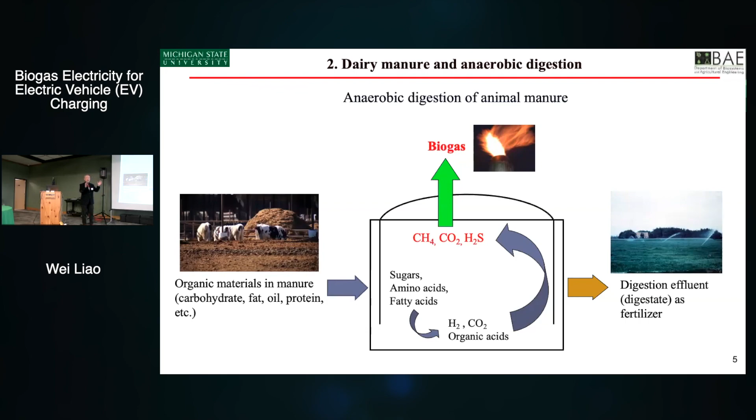If you look at dairy, cattle, swine, poultry, and some other mixed co-digestion systems, and the size, for example dairy, farms with less than 5,000 cows, not a whole lot. All those big ones, 20,000, 15,000, are typical dairy farm digesters in the United States. Overall agricultural digesters, only 332, maybe plus or minus 10 right now. The number changes every month. Just to give a comparison, Germany, a much smaller country than ours, has 8,000 farm digesters compared to our 300. And among the 300 digesters, most are large scale, which in the dairy industry means 1,000 dairy cows and above, only a few less than that.

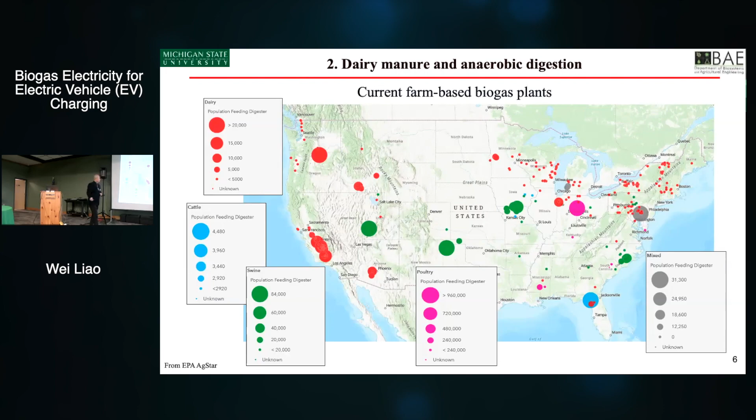And again, to give you a little bit of the overall country picture, because we work with USDA and EPA doing evaluation for the entire biogas industry. If you look at all the livestock, wastewater treatment plants, landfills, and the current status, based on current renewable natural gas and down the road electricity for electric vehicles, we believe there's huge potential for this industry to grow. Not only the agriculture side, the municipal side too. And we strongly believe down the road decentralized systems will be part of the picture.

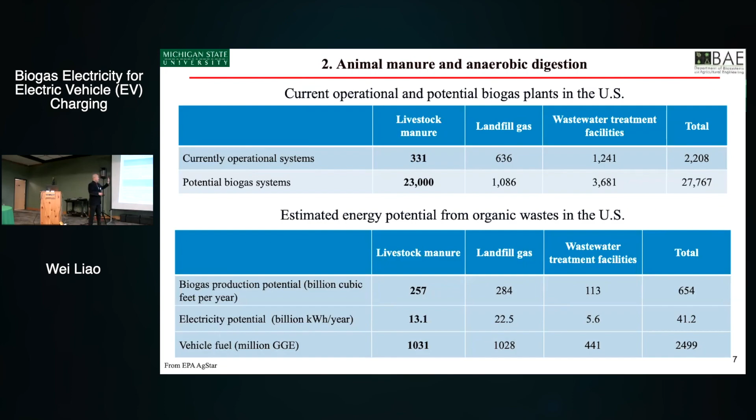The United States is good at building centralized facilities. Large cities, Chicago, Detroit, build big systems. But considering infrastructure investment, smaller systems have some advantages. Down the road it's going to be a combination. I'm not saying no large infrastructure investment. There is some, but decentralized systems, particularly for rural communities, will be the key player for the infrastructure, not only digestion, other things too. So that's a little bit of an overview to see the potential there.

I'm going to jump into the topic and show the current pathways for farm-based biogas utilization. It's pretty clear at this moment. Renewable heat and electricity: the easiest way is to put the engine there with the digesters, burn the biogas, and generate electricity. And then, of course, in the past 5 to 10 years, it's renewable natural gas, particularly with California's low carbon fuel standard, around 12 years of history for that program. These are the current two pathways.

Again, as I mentioned, both pathways have some challenges. Right here is a little bit of a long sentence. I'm not going to read it, but very much for small-scale systems, the current heat and electricity generation pathway is tough. We run our own engines, oil changes, and maintenance. Sometimes you need to take out the piston and clean all those kinds of things up. We have one dedicated person for our small system, a much, much smaller unit operation.

We only have 400 kilowatts, the unit on campus, but we have one dedicated technician to handle everything. And of course, we build our system - everything we import from Germany. In the first couple of years, we actually flew German engineers to do all the maintenance stuff. Very, very expensive and very complicated.

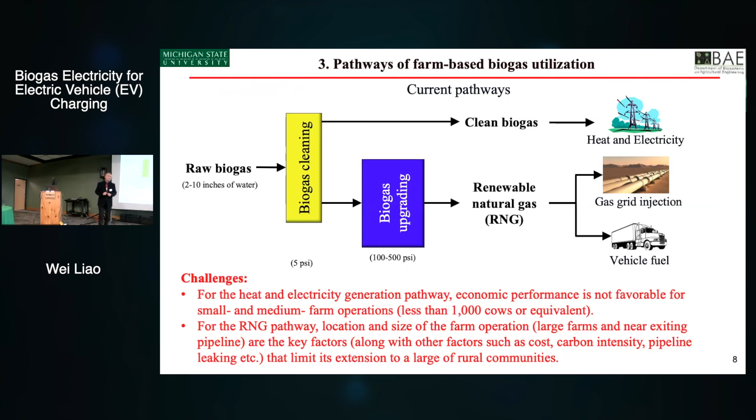The entire biogas upgrading unit is a $40 million investment. Of course, that operation is big - you think about that investment. Again, this is not, at this moment, economically an option for small to medium farms. That's very clear, right? Okay.

Then what do we have in our toolbox, particularly for - too fast, let's see one more slide - what we can do. And again, thankful to Elon Musk - let's see, Tesla, they're leading all that kind of EV stuff, started probably 15 years ago.

And that makes a third pathway possible for agriculture - let's put this case, the dairy industry. So which means start from biogas, and again as mentioned earlier, we need to design those maintenance-free engine systems. For this particular case, we work with Stirling Engine Company - we have two units testing at our facility.

Talk about external combustion - environment friendly because it can just use fuel and air inputs to maintain the flue gas, satisfy EPA standards, and then generate electricity and generate heat. And for that particular case, the electricity is going to go for EVs - the cost of value.

And currently this morning, Kevin talked about electricity costs, like 4 cents, something like that - that's not going to happen for farms. Farm, you can tell me 4 cents per kilowatt hour for electricity, or even in Michigan you have 8.6 cents per kilowatt hour for renewable electricity - farmers aren't going to do that. Consider all the paperwork, right?

And the cost - so you take that money back, you put a digester on the system, it takes you 20 years to get the money back. Find the payback period, at least - you'll see some numbers we did later on. So that's not a solution.

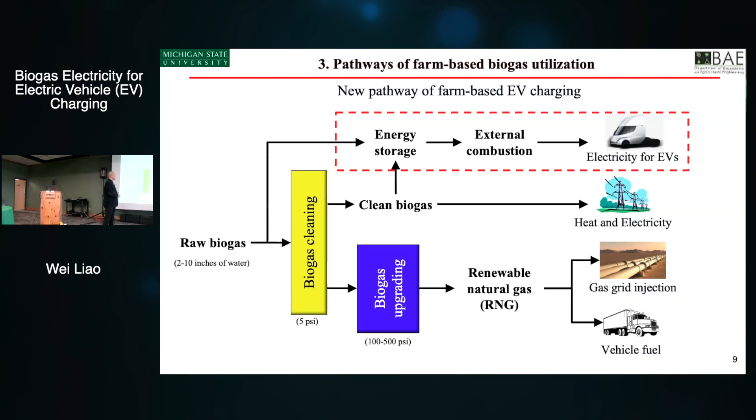And that's kind of a general approach for dairy farms. And then we have digester. Again, at MSU ADREC, we focus on all the clean water, like the car mentioned, and very much solid fertilizer. We're not looking for liquid, we really need a concentrate, semi-solid to solid. And of course there's some ammonia, but I'm not going to cover that. We do some things, liquid ammonia with a different technology, but it's not focused on fertilizer.

We take ammonia as a green ammonia fuel to power. Actually it's clean burning, just generates hydrogen gas and nitrogen gas. The process, the company will focus on that. If we have a chance next time I can talk about that. We'll do tons of research on that piece.

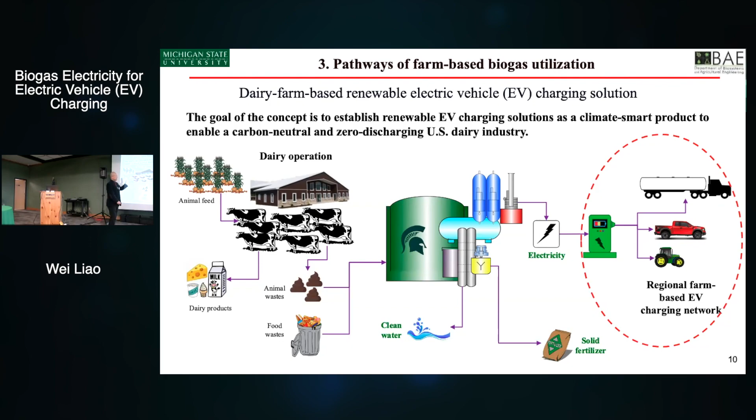And let's focus on electricity, just for the EV stuff. We want GIS to run all kinds of analysis. So, okay, we just use our systems. Our systems are pretty small and really represent the small scale operation.

MSU, the campus digester - I think we are the first one in the nation to have a campus digester, and UC Davis is next. UC Davis's digestion system is not on their campus, but they deal with their food waste.

So this is our system. We have like 400,000 gallons, a little bit around or a little less than 500,000 gallons of tank storage, because the EPA standard requires us to store that liquid for 6 months. We built that green tank behind with 2.1 million gallons of storage.

And for this system, we scaled down because MSU has 5,000 acres of land, the big campus and agriculture land. We use that as fertilizer for our land, which isn't ideal. We can change that - we want to turn those things into solid, semi-solid fertilizer.

And we have CHP - we have 2G, the German 2G system, a 400 kilowatt unit, and the feedstock. Again this is very interesting - this morning I asked a question about an interesting aspect. We have manure and food waste.

If you look at the California, Oregon, Washington systems, most of the digesters go for co-digestion because it increases methane biogas production. However, EPA has D3, D4, D5 regulations - it really depends on what market you're targeting. You need to twist things a little bit on the front end. We are trying to work with EPA to modify their standard a bit, to give more space for particular small and medium farms so they can generate more gas and more revenue.

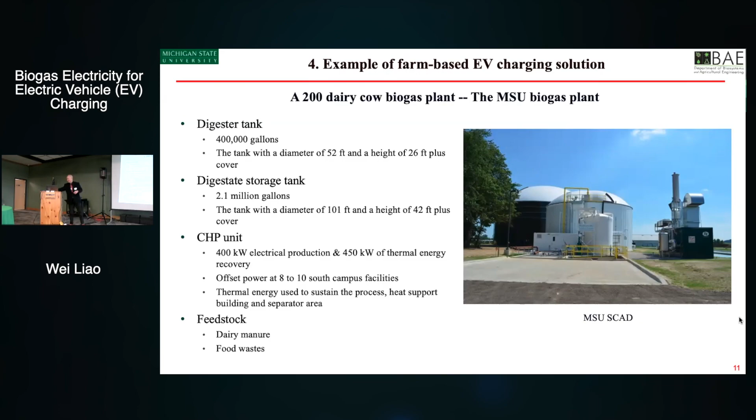Yeah, it's good. So this is kind of a flow chart that everyone knows, for the food waste. We have a food receiving piece, and getting into the digesters we have 26 days retention time. Our temperature runs around 110 degrees Fahrenheit, so regularly a little bit higher than mesophilic, in that neighborhood.

So after that we have the holding tank. We do have a press compressor to do liquid-solid separation. The solid goes to our on-campus composting facility where we do composting. And the liquid we're actually pumping back into the big green tank, storing for 6 months, and then apply it during summertime on the field.

And the composting biomass, we actually sell it for $40 per yard, and some of us, like me, take some every year for our yard. My tomato flowers bloom every year - it's very beautiful, I like that composting material.

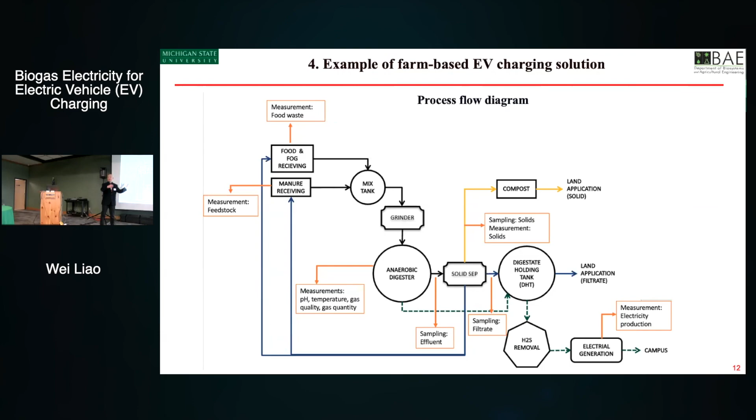And the other material, because we are so close to the capital, Michigan, the state government picks it up for landscaping. So this is kind of our food feedstock - a lot of food waste. We have two bays, manure bays and food bays, we can handle all kinds of things. We have a technician dedicated to this operation.

I have to tell you, if we do co-digestion, the people running the system get to know the feedstock better. We get all kinds of different things, sometimes hard boiled eggs and all those things. Then based on actually running analysis for those samples, we know the categories, and based on carbon nitrogen ratio we adjust the feeding rate for our system.

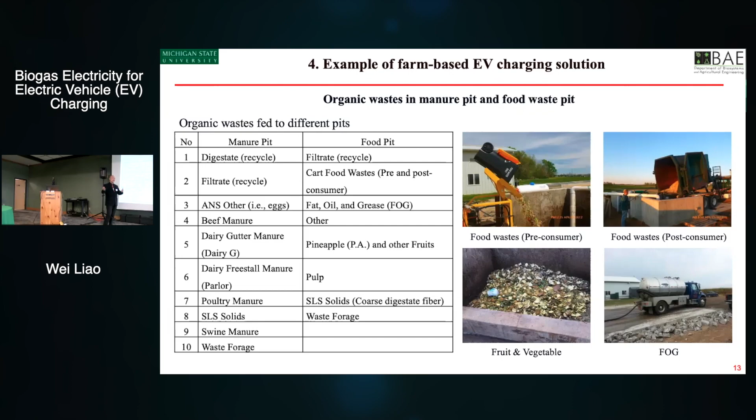Gas production can increase like 40-50% sometimes. It depends on which market or revenue you want to generate. That's your own decision, and those are some aspects I could quickly go through. I really want to have some discussion with this audience.

So these are just annual real numbers. The food waste pumping is at 21,000 metric tons per year, and this is a 5-year average. We ran the average from this data from 2017 to 2022, and we generate over 1.3 million cubic meters.

Sorry, this is for general publication, so we change to international units. And then, of course, the wet solid, solid filtrate, effluent - this is our mass balance. Based on these numbers, we do our energy balance.

We meter everything - heat input, electricity input, we have meters, and we calculate on a daily basis the energy output, and then we have a net energy output. We generate a lot of heat.

Heat we use - we have our own barn on the facility, there's floor heating. We heat our own facility, majority of it, and use the heat to maintain our temperature. We still have extra heat that's just released to the environment.

Net electricity output is over 2 million kilowatt hours per year. So that's just the energy balance again, real numbers. Our methane content is between 65% and 70%, depending on the year and the feedstock combinations.

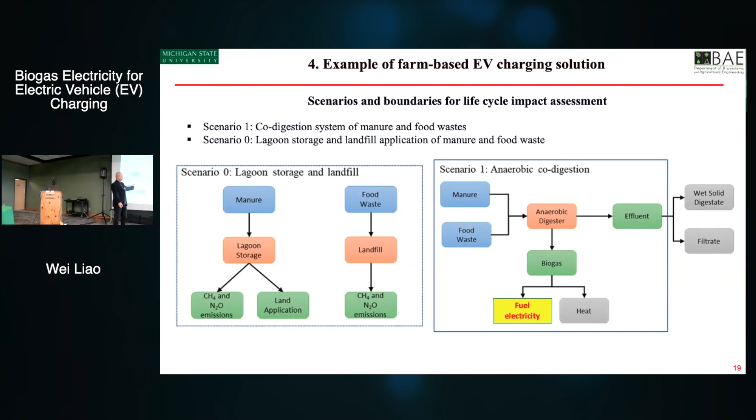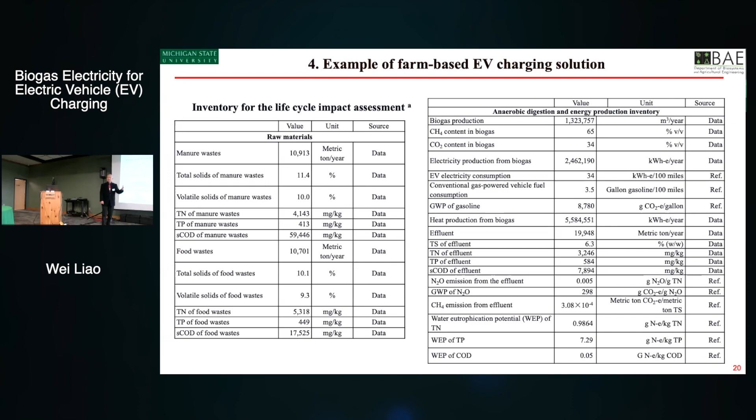And again, we use conventional manure, because we have two feedstock streams, manure and food waste. Food waste typically goes to landfill right now, and manure is just lagoon storage. We compare with newer systems, anaerobic co-digestion systems for fuel, electricity, and heat. You can see this is all numbers, I'm not going to detail. This is for the calculation, our own numbers, and all those EPA emission conversion numbers we use for our modeling.

Because remember, we have 4 streams, right? Carbon, nitrogen, phosphorus, potassium. We just talked about the carbon stream. If we recover all those nutrient sources and reduce the nitrous oxide emission, that's another step toward a carbon neutral dairy operation. Still not enough, but another step. We need to control the animals. That's something our animal scientists are working on.

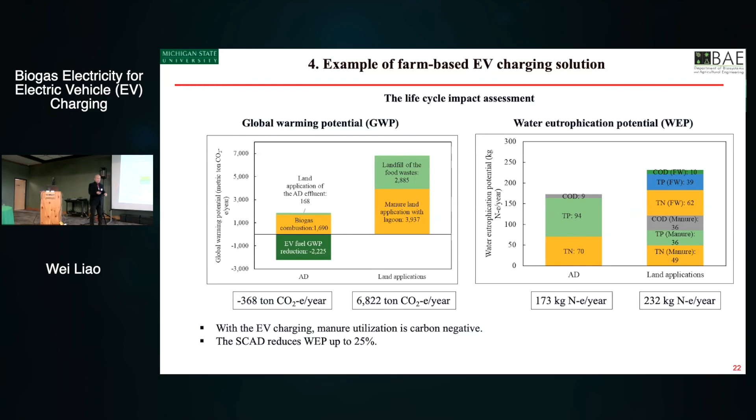Okay, then let's look at it. Sounds pretty good. So, okay, EV is a good thing for the dairy industry. Let's put those digesters there and generate electricity. Again, not that easy. So, as I mentioned, this morning I asked Kevin questions.

Electric vehicles are different from our gasoline vehicles. Where are we going to add gas for our cars? We drive to a gas station, right? And in the United States, right now, there are 120,000 gas stations around the country. And you just go there to add gas. But for EVs, where do you go?

We talk about sedans or SUVs, a truck you drive. And like Kevin mentioned this morning, that's the way it is down the road. You charge at home, very much at night, right? Go back home, put the charger on, and the next day drive them out. So that's a typical approach for the family-use sedan, or EV cars.

We're not even targeting that market, because down the road it's probably like a building code, and you change a little bit for those. Maybe, again, not complete agreement. Kevin this morning mentioned, okay, if your home has 20 kilowatt capacity, you can rely on that. You may still need to increase a little bit and have some other things going on. And the building code, like power code, may change a little bit there too. But for the family-use car, you may charge at home.